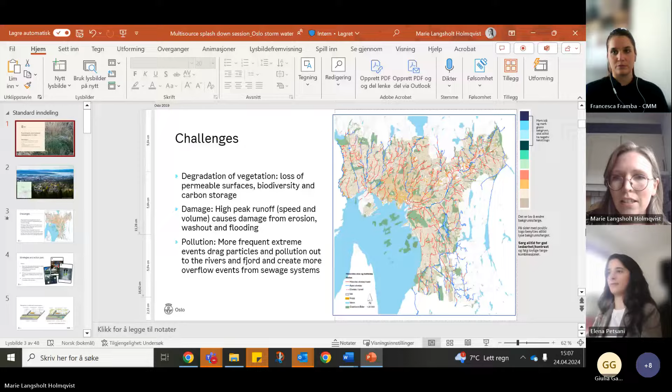Do you see the presentation in presentation mode now? Yes, great, okay perfect. So I'll say a little bit about the stormwater management in Oslo and the new guidelines we have for stormwater management.

First, I just want to thank some colleagues of mine in the planning and building agency for giving me some slides to this presentation. It's a cooperation with them that I'm doing this presentation today, because they are the main owners of this stormwater manual in a way, but we have co-developed the whole thing.

So a little bit about Oslo. We are a city by the fjord, in the corner of the Oslo fjord, as you can see on the map down there. Our municipality in total is actually mostly forest, but with a development zone closer to the water. Within the forest, of course, not much development is happening, and things are okay. But in the development zone, we have increased densification to avoid expanding the city into the forest area.

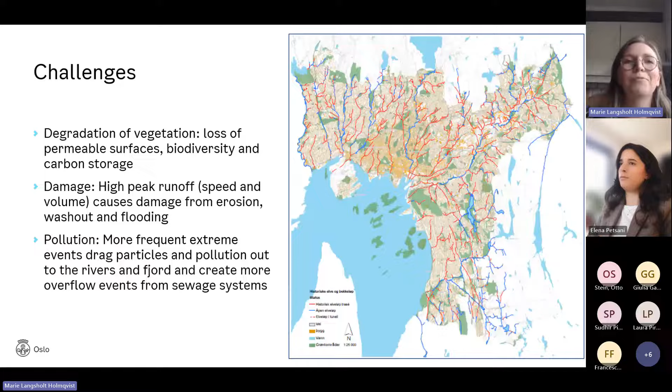To act on these challenges, several strategies were implemented politically, and we also got an action plan for stormwater management. The goals of these strategies are to face the changing climate.

With the changing climate, we also get an increased chance of a cloudburst and more intense cloudbursts than we had before. So we want to meet this challenge and reduce the consequences for people, buildings, property, and infrastructure. A second priority is to protect the environment and ensure water quality in both the rivers and the fjords. And then lastly, to use stormwater as a resource in the urban environment.

So the strategy points out a direction where we are moving from a traditionally closed system for urban drainage to a more open and nature-based, surface-based system. We have a long way to go, but that's sort of the goal.

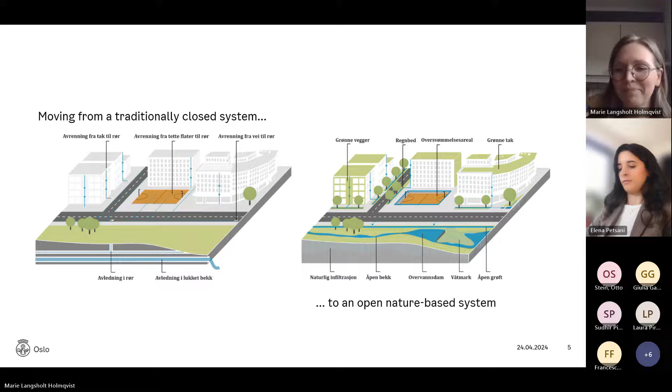So a part of this strategy or this action plan was to make a new stormwater guidebook with new requirements and guidance for how we want stormwater to be managed in the city. We had broad cooperation with all the different agencies of the municipality to make this guidebook, and it was published last September.

The guidebook includes, it's quite large and has a lot of information. It's a detailed framework for stormwater management, mentioning both the existing laws you have to know, but also the specific guidelines we have for Oslo. It also defines the different parameters that affect both the runoff and the water quality of the city.

And how we have to work with these parameters to reach our goals. It defines the dimensioning criteria, so how much water you actually have to manage on your own property - I'll come back to that in a minute. There are also a lot of recommendations for what kind of solutions we want, how they should be implemented, and some examples of how to do this.

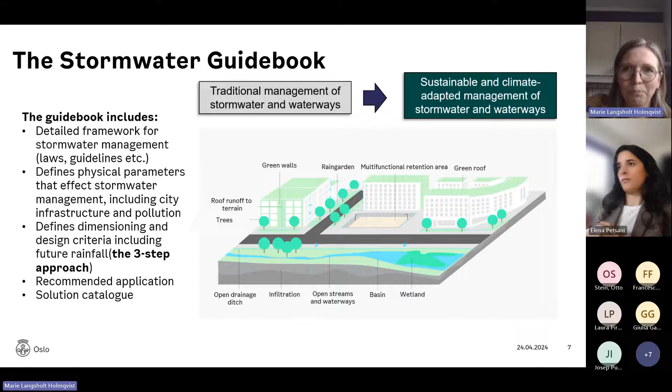So an important part of our approach to stormwater is the three-step strategy. It's quite widely used in Norway and also in Oslo.

We worked a lot on what kind of dimensioning criteria we should have for these three different steps. The biggest change - because we used this strategy also before the new guideline was implemented - is that in the new guidelines we shifted the focus a little bit, because before step 2, which is delay and retain, was sort of the main focus of the stormwater management.

But now we try to focus more on the everyday rain, so the low intensity rainfall, and how we can use that both as a resource to water the vegetation and to help push the implementation of more blue-green areas in the city. And then also to look at step 3, which is the cloudburst rain - the rains that don't come very often, but have big consequences when they come.

So this is a bit technical, but for the low intensity rainfall, we require that 10 millimeters of rain, regardless of the length of the rain period, should be treated with nature-based solutions on site. So that's like a minimum recommendation.

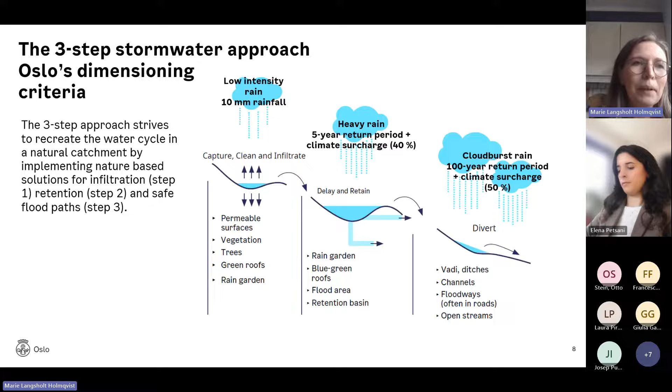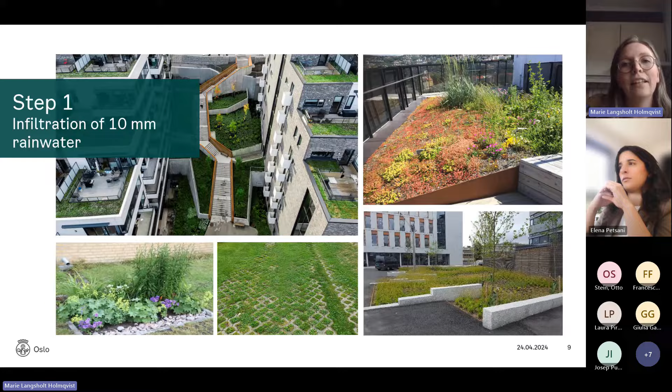So with step 1, as I said, we have a bigger focus on this step now because we see that it's the biggest, or the most important driver for green infrastructure in the city, and also helping with contributing to biodiversity and groundwater recharge, and also actually the water quality.

So for step 1, it's the first flush, as we call it - that's where most of the pollution will be. So if we manage to treat the first flush, then we manage to take off most of the pollution of the stormwater. Yeah, that's the main points of this step.

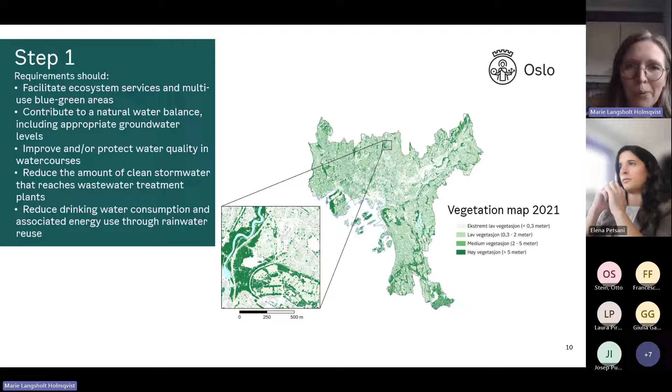And we also have a blue-green factor, which all developments have to fulfill. You put all the different measures you have on your property into this spreadsheet, and then you get a score, and the score has to be within the decided limits. I think Berlin has something similar, and also several Swedish cities.

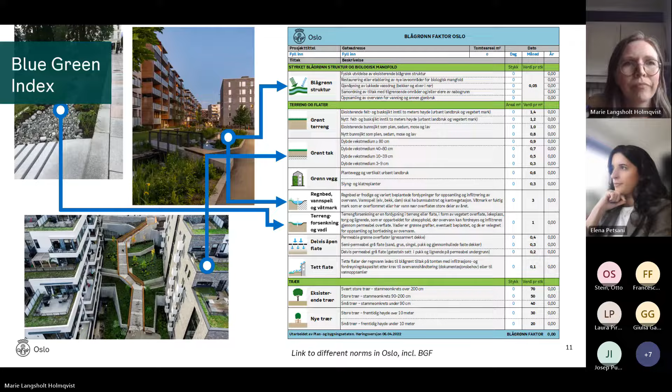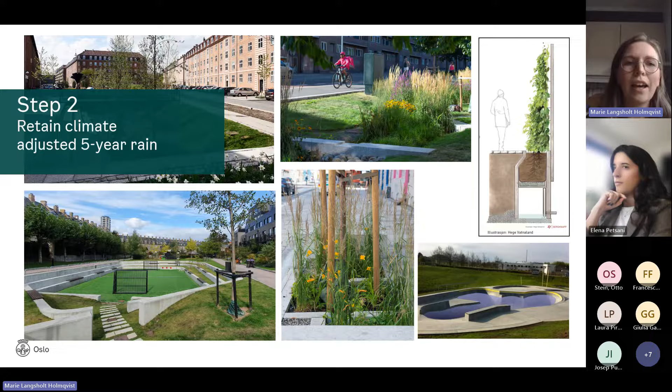And then there's step 2, as I said, the dimensioning criteria is the climate-adjusted 5-year rain event. I will not talk so much about this because time is running, but the main purpose of this step is to reduce the damage and improve land use, but also to reduce the overflow from the wastewater system. We have, I think, about 50 or 60% combined sewer in Oslo.

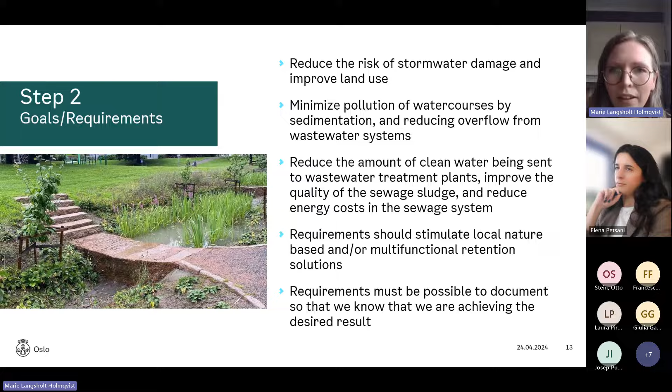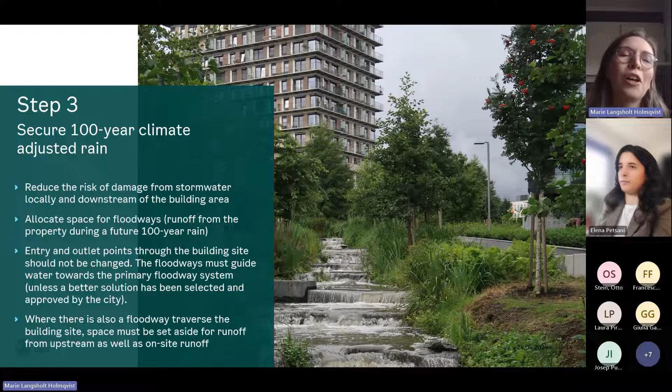This is step 3, which is to secure the floodways through the city to reduce the risks of damage from bigger stormwater events. This is maybe the biggest challenge because it has to be done on a city scale. It's not only each property that has to work on this 100-year climate event, it has to be citywide measures. So we are working on it, but it's obviously going to take some time before we get there.

But on the way to having these citywide implementations, we now have some hydraulic modeling of the surface runoff for the whole built-up zone, so that we can see where the water today would run through the city, and then see where we should prioritize measures.

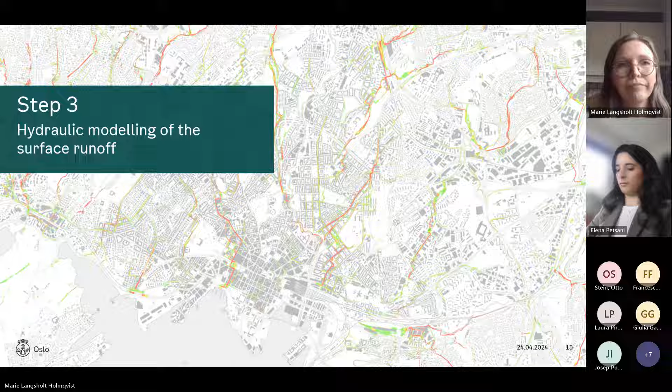Just a little bit about the urban streets in the end, because that's what our pilot in MULTISOURCE is mostly about. This 3-step approach is also applied in the streets, as the streets are being rebuilt in the city. We see that space is always a challenge, of course. There are a lot of functions that have to fit in these streets, and it's difficult to fit them all. So we have a focus on multi-use solutions, but still we see that that's a big challenge.

But then we try to focus on step one, so not dimensioning for the bigger events, but for the small events, to use the water to water the greenery that we already have in the streets, so the city trees, but also the rain gardens. We managed to fit some in.

We see that it's very important to consider the maintenance when designing the solutions so that they will last for a long time. A lot of solutions are built in a way that makes them difficult to maintain, and then their function will not be very good within a few years.

We also see that the positioning of the solutions is very important. I mean, the positioning within the street area so that you get the water to actually run into the measures.

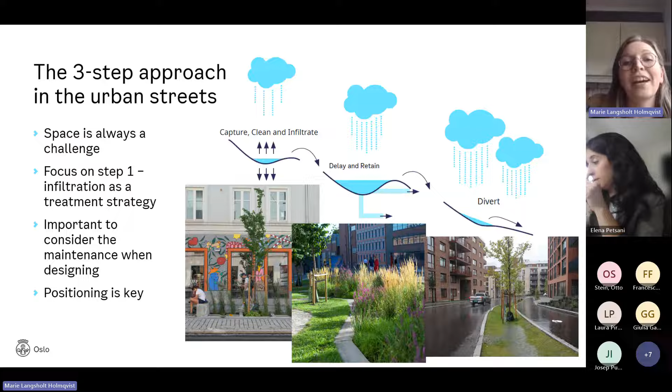Just to conclude the whole thing, which is also related to MULTISOURCE with the co-benefits of the nature-based solutions, we see that the blue-green streets, when done well, are good for the people in the city. That fits very well with all of our strategies when it comes to planning the city streets, because all the political goals are related to making it easier and better for pedestrians and cyclists to move around in the city, and make it a bit more difficult for cars to go around.

Using blue-green solutions takes away space from the cars, but it gives some quality to the spaces we have for our soft street users, as we call them. So yeah, that's it.

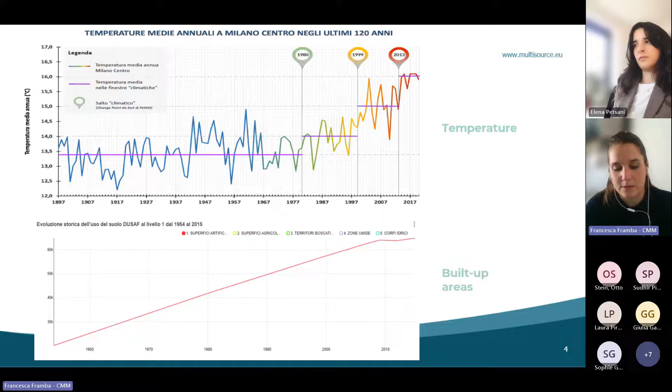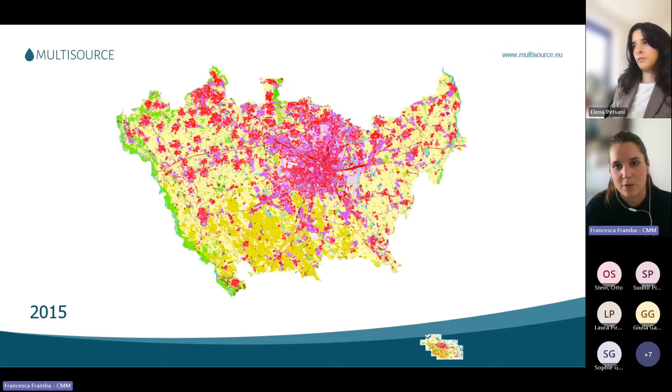We started from this correlation between the rising temperature over the last 50 years and the increase in land consumption. As you can see from these images, land consumption growth is really high, and that brings a lot of problems, mainly for water and for heat.

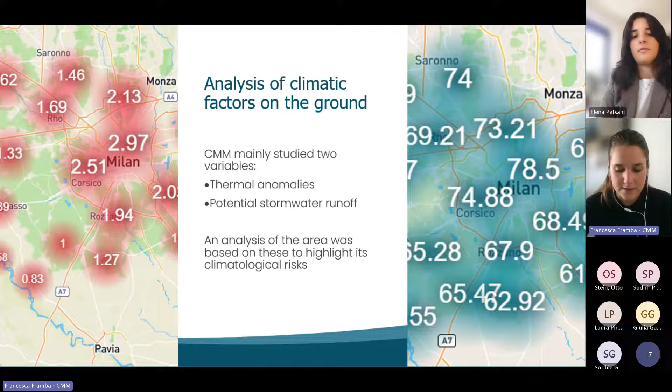So we understood that the two main issues we had were thermal anomalies and potential stormwater runoff. With this scenario, basically distributed like this, the runoff and also the temperatures and heat island, as you can see from the previous image, are really related to the consumption of land.

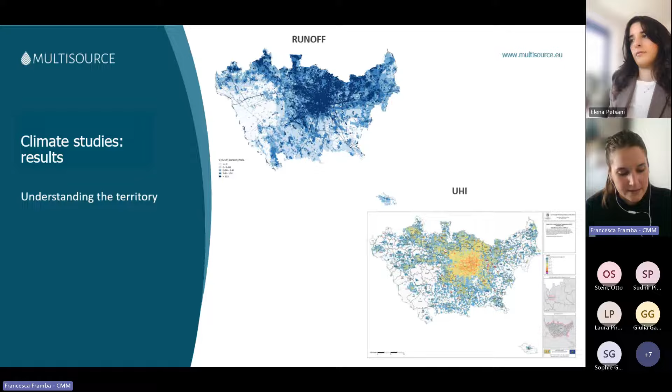In light of this, we developed a territorial long-term strategy inside the urban metropolitan agenda, a framework for us to really envision the evolution we want to see in our territory. However, we felt it was essential that this vision was also translated into the authorities' own regulatory instruments, such as the strategical plan, the territorial plan, and the building construction plan, which are later translated into single municipality plans.

So in each founding document of the metropolitan city, we put some contamination, we can say, of sustainability. And I would really like to emphasize this step, because we believe it is what will enable a true transformation of our area.

So the Metropolitan Urban Agenda has trajectories that focus on diverse topics. The one that involves adaptation to climate change is the resilient trajectory, and it has the objective of limiting the impact of climatic events. One of the actions is the Metropolitan Sponge City.

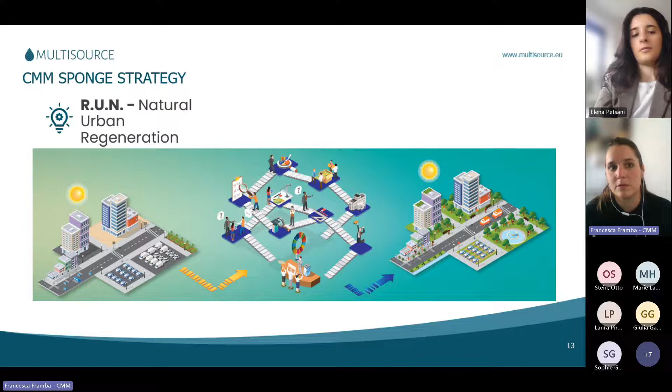So the idea behind the Sponge City strategy is to have a natural urban regeneration, having a more resilient territory to climate change events, implementation of ecosystem services, but also social inclusion and new business models from this new type of intervention.

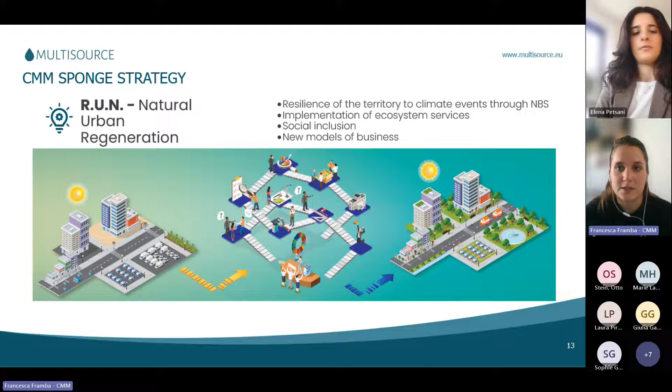The first real chance to bring the strategy into action was the Next Generation EU funding taken by Italy, the government, and from one of the six missions our country selected, the one on inclusion and cohesion is what we used for this first round of implementation.

Right now we are developing 90 interventions, all in public areas, in 32 municipalities. What we are doing is basically intervention about infiltration and retention, and de-impermeabilization and stuff like this, as you can see from these few examples.

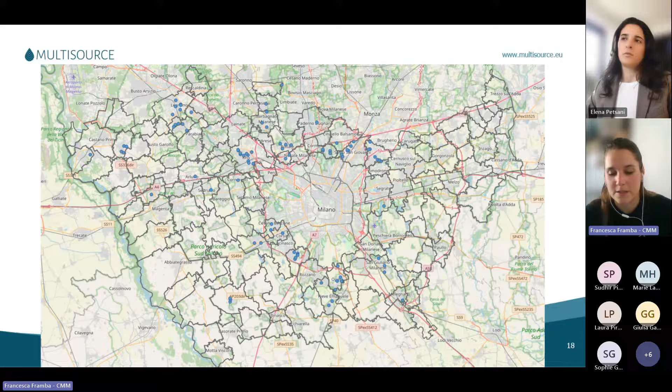And this is an image of where the interventions are geolocalized throughout the metropolitan city. As you can see, the larger number is in the north, because that's the area where the problems are higher and more frequent. But yeah, it's as you can imagine, just a first step, a massive first step in this strategy.

Now I wanted to tell you about the expected impacts, because as I said, these 90 interventions are going to be finished by mid-2026. So we don't really know what's going to happen, but here is what we envision.

The first impact is the replicability of this intervention, so the standardization of the problems we are going to manage, the technology, but also business models. This is something we are doing with the contribution of the MULTISOURCE project, which has been really interesting to see what the partners can bring to this strategy.

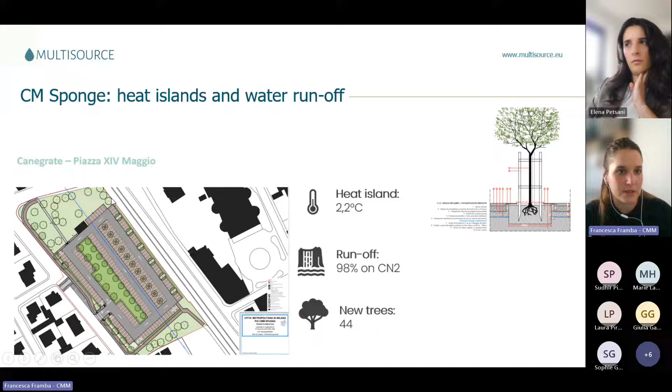This is an example of an intervention that was designed where we had these two main issues: a heat island of more than 2 degrees and a runoff percentage of 98%, so really, really high. And this is how it is going to be.

The third impact is about what we call territorial education. Our goal is to create awareness to the citizenry of the phenomena, but also the solution we selected, why and how it works. This is starting this September. But we are also training the people who are going to manage this intervention after the end of the implementation, so the municipal maintainers and also local administrators.

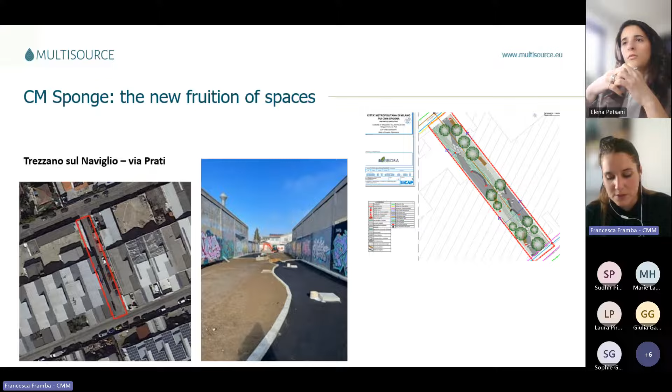So yeah, that's it. Of course there would be so many other things to say because a project of this dimension is really complex and we had issues. The time is really short, but things are going pretty well. We think that this challenge we've given ourselves is a great opportunity to see a transformation that's widespread and that's never been done, at least in Italy. So yeah, that's it. Thank you.